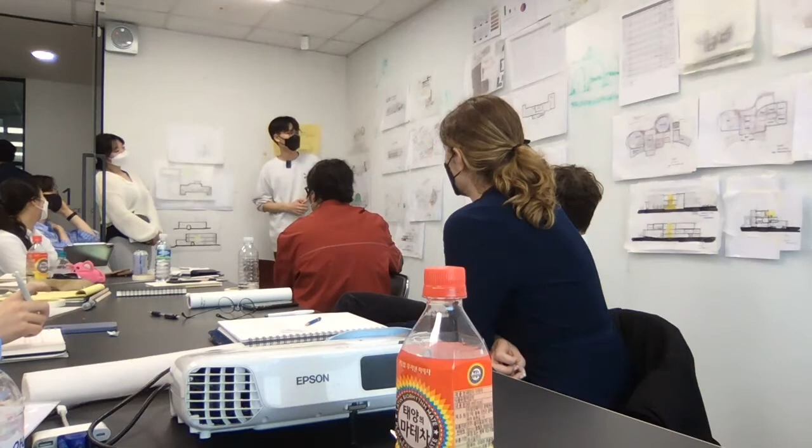And I also think that this side of the building is way too shy compared to how it faces the main road. So I think the artist house right now lacks this facade being more articulated and more welcoming to the people passing by here. That's why I want to extend this part to show people there is something here, and people can just enter through this part.

Okay, how about the extension in the back? Because you have this kind of addition to make a new entrance. What about the back, the south side? So this thing started with this line because I felt it needs to show here in this elevation, and I felt that there needs to be a balance to the addition here. So I thought there should be something here, and I drew this line.

And I found out that if I try to put all the programs, such as library and recording rooms, then there is a lack of a more open and lively space, a space with sunlight. So I felt that I need to add an open space with cafe and auditorium, so that people coming from here are also considered, we cannot not think about that.

So this can be a sub entrance. And since quoting from this sight line, I also added a diagonal line, so it feels more free, just like the facade here. So that's why I came up with these lines.

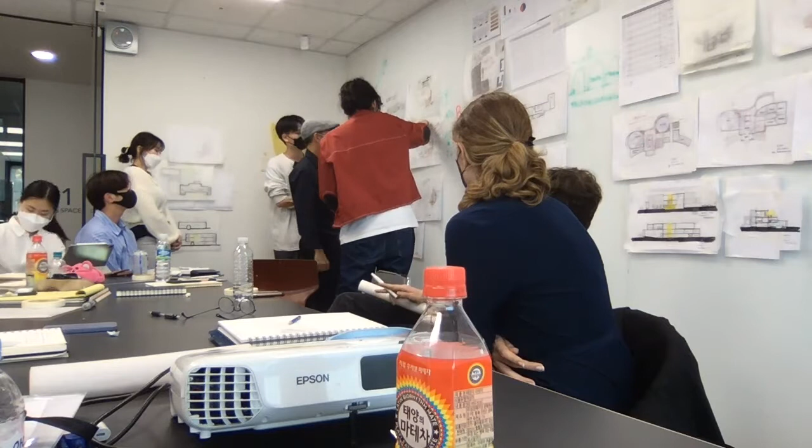Oh, they have some street on here because the building has some void on here, so they connected. So that was not really intended. This part is what you're commenting on. So this is where a study model may help you, because you can see through and see how it works.

More comments about this? Speaking of a second entrance, many will think he's doing a library. Who is doing a library? I thought there were more, three libraries, not bad. Who's doing a museum? Nobody, one museum, not bad.

But we have two healing centers, that's unusual. So those doing libraries, what inspiration did you get here? What is he doing wrong? What is he doing right? Or nothing to say?

So this yellow is this yellow here, so it's the auto spaces here. So it is first, second, third. It is this section, A to A. Okay, again, this is a problem of communication.

When you use colors, try to be consistent with them, so we recognize things, because I would think this was kind of the extension, which is higher. Then I see the section is a different white, right? But I would expect this color to be the same color over there.

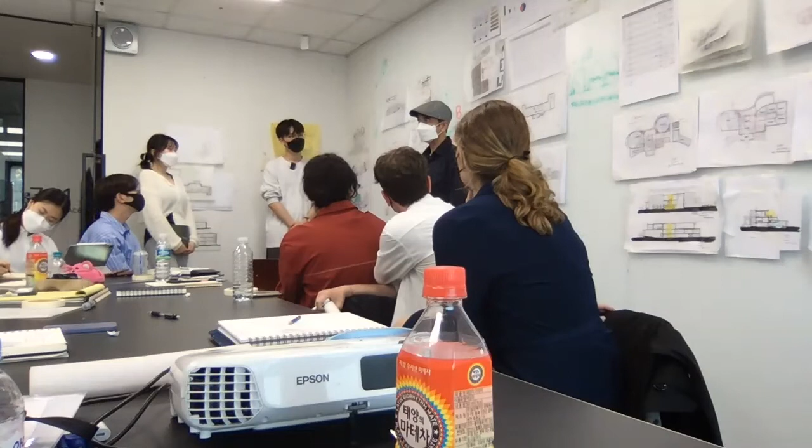So interestingly, libraries are very strict with the circulation, because you have areas which everybody can use, and some areas which need some kind of control. Even in Sweden, the country of freedom, you have some control to go to the library and to the spaces, right? So it's very open. So circulation, how you move around, is very important. Three entrances, maybe you may need more or less, but there is something in the middle, which is the entrance, right?

Imagine you have an appointment with your girlfriend. You say, oh, there's a great library in Marronnier, let's meet at the gate. And you're waiting here, your girlfriend there, and then you never meet, broken relation because of that. Well, that's something we have to be careful about, right? So if you want to make a main entrance, that's perfectly okay, it's a way of solving some problems here, but everybody should understand it as the main entrance.

And within the entrance is so clear that it's very hard to compete with it, but still you can do it. But that entrance should be justified not only because it is closer to the main street, you don't need to go to the full square, but also because it makes the full system of the library work better, or the control access and so on.

As it happened with the theater, the cafe is always an ambiguous space. If you're in a really controlled library, you cannot go straight to the cafe - you have to leave your books, get out, and go to the cafe. But you may have a cafe with open stacks, so it could be somewhere in between. You have to think about this kind of layering of the space.

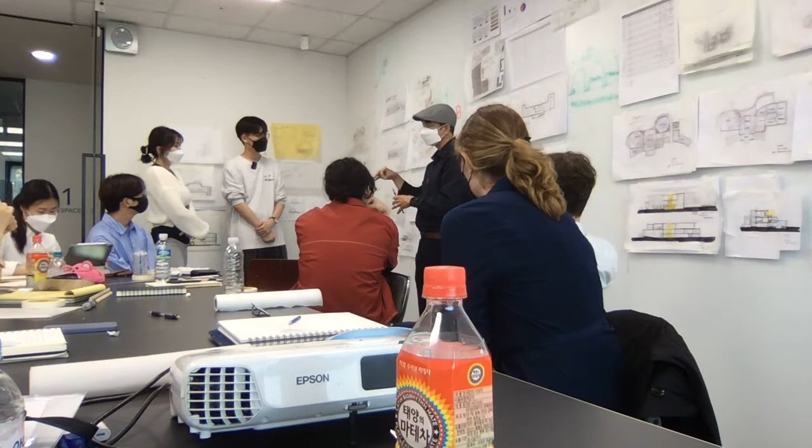Anybody with a library needs to really work clearly on the character of the spaces, because most of you have specialized areas and control the stacks. How is the circulation around? How do you divide people? And still, as was said, the building should be clear - you don't need somebody telling you the way at every step.

The anti-clear space is the subway. You go in the subway, and unless you know the spaces by memory, you have to look at the signs to know where you are. It's super annoying - you go downstairs, you have to go upstairs, and then downstairs again.

So don't do that in a building. This happens in a building, right? But when you study circulations, there must be logic. Is this in your project? No, I said I always go in the wrong direction in the subway, but maybe that's a me problem.

Not a problem of the subway. Well, the subway in Seoul has its things, but it depends. The older lines are more tricky - Line 1 is very tricky because it's very narrow, sometimes you have to get out to the street and change direction. Newer ones are much easier, but the problem with Seoul is the subway is so huge - even if you get in the wrong wagon, you have to walk for 10 minutes to get to the other side of the train. Well, yeah, but that's the anti-public space - you have to follow signs, but it's not inviting at all.

Try to avoid this kind of ways. One thing which I think is positive is it's very clear what is existing and what is the addition. But I miss the interaction - a small overlapping instead of always a very clear limit of new and old. Surely something happens in between, and I think this is most interesting.

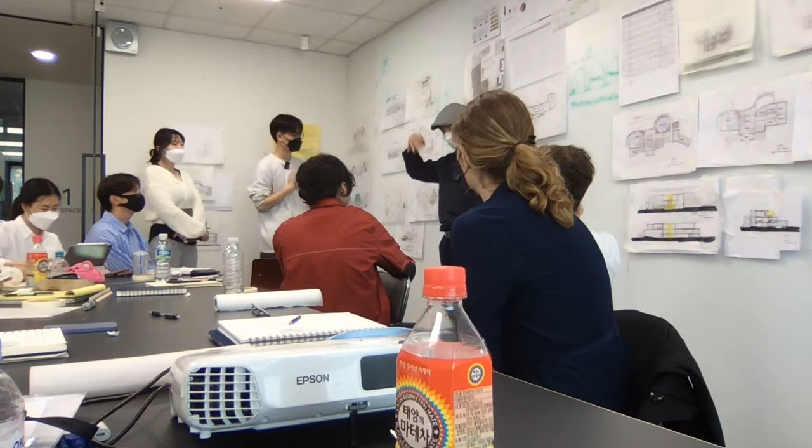Pompidou is a great building, in a very dense area of Paris, and it's a very intelligent thing. The moment you put the sloped ground, it has to react to that slope, and people stay there for some reason. There's a very intelligent way to have one more floor in the building without making it higher, with very easy access. As a comment, when you make something sunken, you have to make it feel like it's not a sunken space - you feel you're really not underground. I think that's successful because it's so big and fun. People go there and stay and play, because the ramp, the slope itself, is inspiring. So it's something which may be an alternative to those ramps, which could be a full space in a ramp.

There is, or there were - because one of them died last year, I think - a couple, one French architect actually, but there were a couple, not famous, but quite interesting, from the 1960s, 70s.

Who are they? Claude Parent. And Paul Virilio.

Maybe it's the recording of the previous session, since it went straight to the computer, so my hard drive is getting overloaded with videos. Okay, so the first session was recorded and will be on YouTube, not on the Zoom site.

So Paul Virilio, well, they did some projects in the 1960s, which was the oblique architecture.

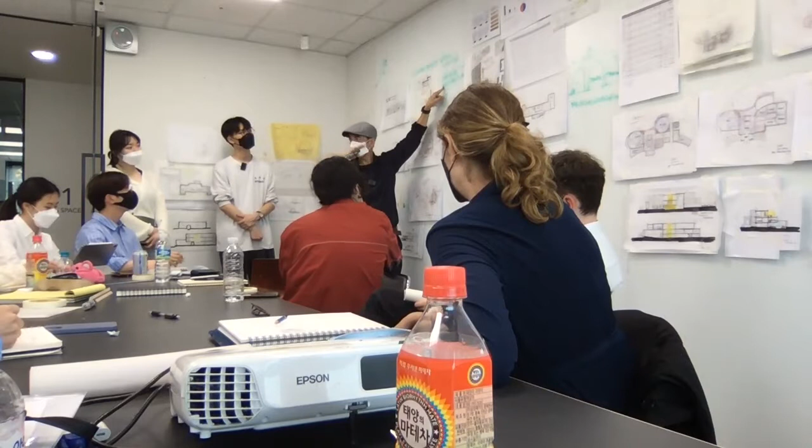Virilio actually is a philosopher, so he helped Parent set the ideology of oblique architecture. It's kind of a full theory of a new way of making cities. They were very radical: all buildings would have no horizontal floors, everything is slanted. So the full city is conceived on slanted floors as a way to have continuous space, accessibility, and more space with the same volume.

They did not build much with this idea. The drawings are fantastic, like Beaux-Arts, very beautiful pencil drawings. There's a book, you can find it I think in English also, a small manifesto on the benefits of oblique architecture. And I know they have, with this idea, just a very few projects, maybe one showroom and a church.

They call it the bunker because it's all concrete. So actually the church, you have the ground, and you have one element which goes up, and another element which goes up. So you have these two pieces of concrete from the floor to the church, and then the light comes in, something like this in diagram, more or less.

Okay, so this is to speak about, of course, the Pompidou is about this time, so surely this was published when they did the Pompidou, and this is quite a demonstration in terms of production. This could be possible. Yeah, this could be. So I think this is most interesting.

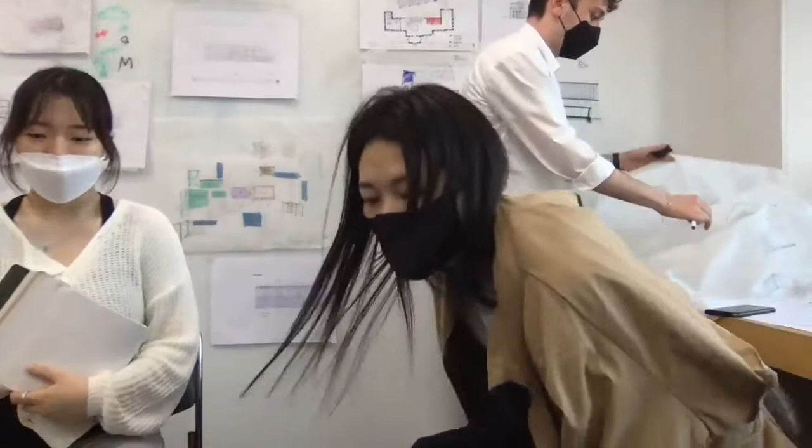Okay, go on. So what are you doing? Because you were with the bits the other day, and now you put things together, but still very much in just a building, a little bit of context. Yes, I'm again with the bits, but the bits from another part of the whole complex.

I've moved from the smaller buildings that I want to integrate into the square, into figuring out the main part of the renovation process, which is actually working on the building itself. Now I've changed most, if not the entire, inner configuration of the building.

After I looked at the beam plans and everything, most of the inner walls shouldn't be affected by movement, most of the floors shouldn't be affected by the movement of the inner walls, which means I have quite a large degree of freedom when it comes to moving stuff around.

Now, I still have my ramp building in the back of the existing building, and I try to fit in the program. So you're moving on the building? I'm not moving the building, unfortunately. But I have started putting in a program.

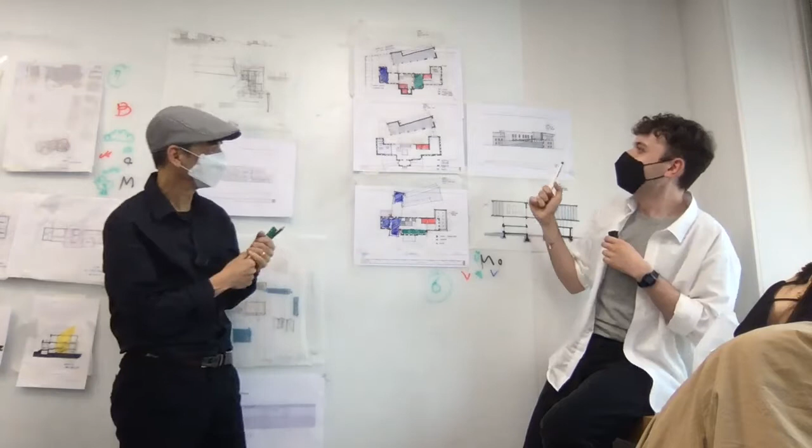Okay, go on, I still have to put everything together. Okay. And then in this side where the grid is, I wanted to do the outdoor welding and painting area.

I was thinking of introducing some sort of boundary, not to close it off, but rather for the safety of people who walk by, because welding creates a lot of sparks and is quite noisy, and also possibly blinding if you look at it, which is not fun at any time.

And then I kept thinking about the supplementary uses to the workshop, which also needs storage and service areas. In this case, I wanted to bring those into the building because it would make a nice core that opens up to different sections of the whole workshop area.

So people who are working outside with painting, working in the courtyard putting things together, or if anyone needs something from the building itself, they would have a center with the storage and some area they could use exactly for the materials.

Also, I've changed the core of the building. I've changed it into an atrium because I felt that would declutter the building quite a lot more. It would make it way easier to transit through and would give you quite a good idea of where you are in the building.

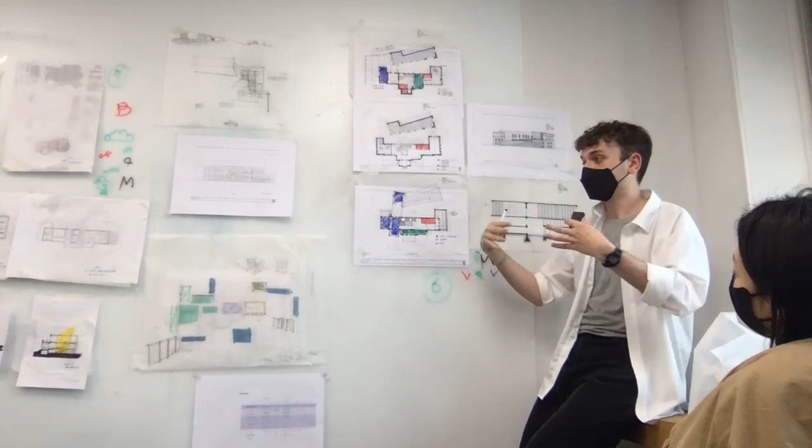It also creates a much more interesting shape, and it also completes the courtyard idea without closing it off on the lower levels, which means that on the ground floor you can go through it freely without any obstruction, but there is a volume above you.

Which closes everything off. This also helps with accessibility, since the second ramp that goes from the top of the workshop to the top floor is also included here, because I had the feeling that ramps inside of the building would be a bit of a mess.

They're quite difficult to integrate, yes. This is an overview of the south facade and how the ramp system works.

This is the first ramp that goes to the intermediate level. The workshop is quite a bit taller than one floor, but not as tall as two floors. I'm quite lucky because the floors get progressively taller, so that below the top seminar room volume, there's still enough space for people to be able to walk underneath.

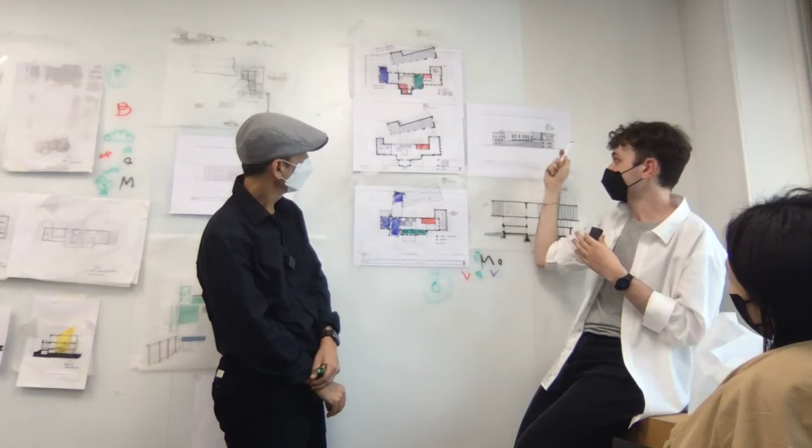And then this is the second ramp that leads up to the top level, which completes the circuit. This section is done through here, I think I've marked it. It's not very visible, but this is the section through the whole length of the added volume.

So this is the element protruding outside. Yes, exactly, this is the element protruding through. It looks bigger here. Oh, because this is 200 scale, this is 100 scale.

I might have made it stick out a bit more maybe. Yeah, maybe this is more proportional. Okay, because I wanted to see how the whole building would connect.

The existing building is this part, right? Exactly. And then everything else is added. This is the inner courtyard, as I said. Nice, comments to this?

Question, did you also work on the north facade, so the front facade of the building with the addition? Because you push through the building, but I'm curious about how that works with your cantilever.

So everybody's copying you today. You should get a fee from them. I have not done a drawing with it, but you will do it right after. I will do it after.

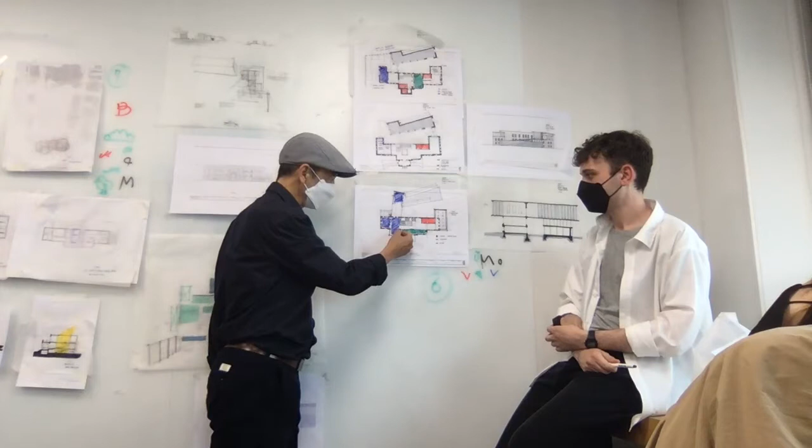Okay, yes, this is a very strong gesture. And actually you have a very tight thing, which is very difficult to solve. So probably you might experiment a bit more with different options.

This space I find very important though, because it creates a very strong contrast, especially since it's casting quite a huge shadow on the building. I feel like this space in particular, and also this joint here, will help differentiate the two building parts and make it stand out even more.

I've also started thinking about the material, and this large load-bearing wall would have to be concrete in order to take the weight from the ramps and all of the circulation happening down here. But most of the building itself, I really wanted to make it out of wood.

Cross-laminated timber would be quite helpful for large spans. You can also use massive wood, which is better even than massive concrete in some cases. We work with those a lot, and I feel most comfortable with it, but I'd say just to avoid concrete.

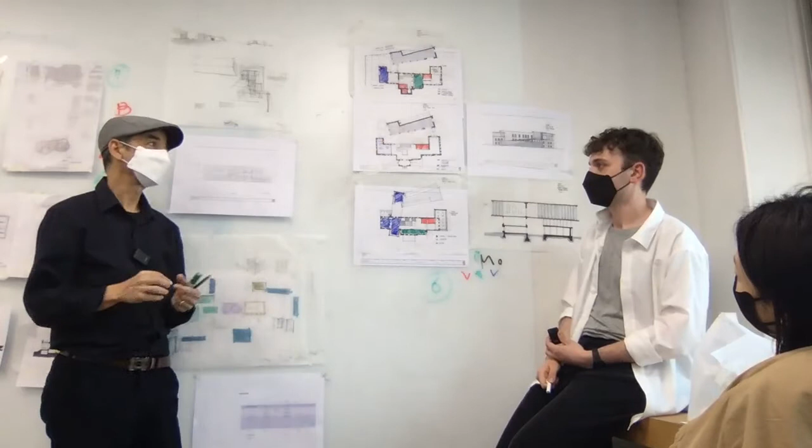Well, I would avoid concrete if possible, but in this case it might be difficult with the weatherproofing because wood is quite sensitive to dampness and moisture, especially in these cases where there's a ramp and the possibility of many infiltrations going on.

Well, you may work on it, but it's doable. Concrete is also sensitive to infiltration, and even worse because the steel inside will rust. This happens in all buildings, you will see the concrete just popping out of the reinforcements.

Okay, so one question of the person who was copied. More comments about this? No.

Okay, interesting the process. So this is quite personal. I think you still, it's good to come from the bits to put the things together. Okay, but still one more step, right?

Yes, it's nice you go to 100, but I think it came too early, and you have so much in your head. Now is an excellent moment to make a small model and test on the side, because I wonder about the scale of this space. Being one floor may be okay, right?

But okay, telling, this is all timber and glass, it's also very easy, thin and glass. And the model you put actually looks great. I even have the measurements down, I just ran out of time.

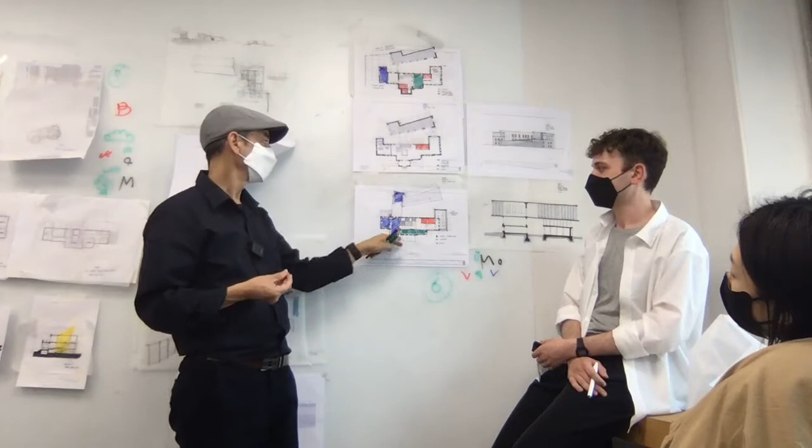You don't need to say that, we see what we're able to do, I'm very honest. Probably you're drawing with too much scale at the moment, which is not necessary, so you're wasting time. Not wasting time, but this could be a midterm presentation drawing already.

For this school standard, that's okay. You can add just a little bit more keywords and some kind of picture. When you're working, you can put just your next sketch over, you don't need to get all the windows done. There's a lot of time to do those things. Some people like to feel better when the drawings are clear.

But if you do this at every stage, it takes forever and it's not necessary. That's one thing, the model. It's interesting you did this section, but I would expect more sections and elevations at scale before you go to that.

But I wanted to see that cafe, so I can just focus on your cafe because it was the area with the most effort put in. It's not here, I will put everything together on Friday and bring it. Yes, but when you put things together you see we have to adjust things and redo a bit.

I would suggest you keep things together. You were telling me this ramp is going outside, right? So probably this corner is going to be, well, on the first level we need to see the street, but it's a bit on the limit of what we can do. The border of the plot will have to be 1 meter away by law, but I think 1 meter won't affect much the whole thing.

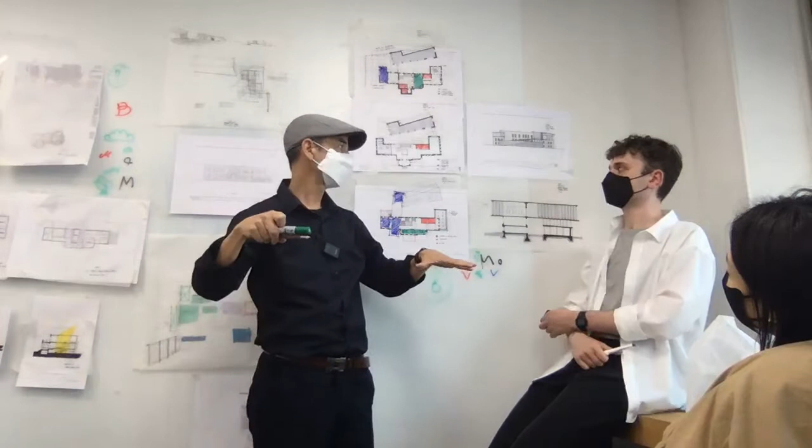That's secret, don't tell anybody. But I think this could be an urban element, you could say actually this roof is public space, the street will be open all day. But if it's on the street, maybe it should be connecting something else, so you have something you can use more continuously.

I encourage you to use the roofs, including the top. This is really about wanting people to be there, and it could even go, well, it goes inside the building at some point.

At some point you're going inside the building, right? I know you're going to the roof. Yeah, it's underneath the building, so this is where it's a different, suspended part. This is different, confusing.

Cut here, so 1 meter above. Okay, so we missed this, probably this floor should already show this terrace. So I think we need to clear it, cut even higher, at least for the ramp, otherwise it's a bit confusing.

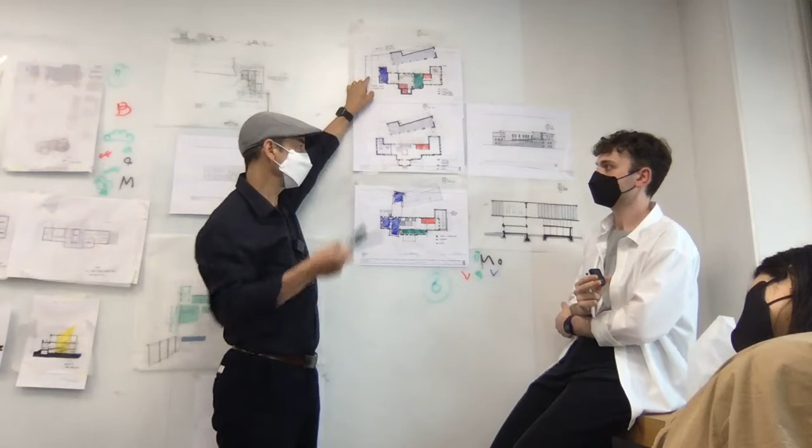And then what we said about circulation, the building is more free, but if you have people working, circulation is not so free because you cannot have children running around. So you need some kind of filter there for the circulation of people who are working.

Right, but now it looks open to the square and everywhere else, and this is a very public space, so probably you have to explain that a bit better.

That is okay, the larger scale stair is better, but I find this one very small. The toilets are uncomfortable there, they're very intrusive, probably they could be in some corner extension.

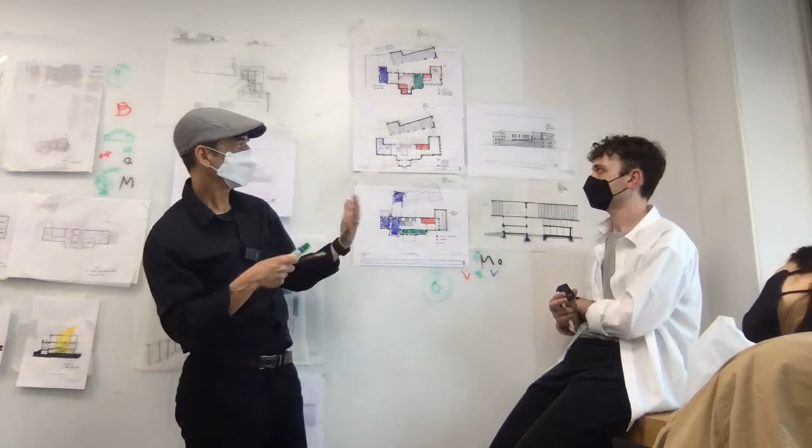So you have a really nice atrium. You could also test the stairs outside, because now the stairs are a little bit big for the building. But okay, this is why you need to test many things before you spend so much time doing final drawings.

Thinking of the material, timber is an excellent option, it's sustainable, soft, durable, trendy, and difficult, whatever, as you said. You can have everything perfect, that's a good choice. Concrete is okay, but in Korea concrete is kind of the obvious choice, so if we can do without concrete, better.

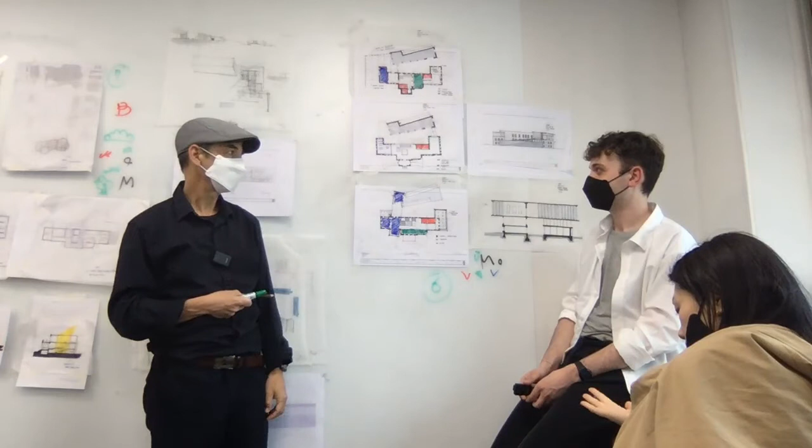The toilets feel uncomfortable anywhere. Well, probably have to think of the toilets not as an abstract addition, but as part of enjoying the space or moving around. Toilets, we have to deal with them, and they're accessible toilets, so you will need a lot of space, and they make sense near the access.

Of course, it is yet very abstract. And you have toilets on every floor, which is a good idea. I try to align them as much as possible, one on top of the other, except for these ones, because it's near the workshop area and they might need a bit more space to clean, or it's more of a wet room. So yeah, probably could be this whole space around there.

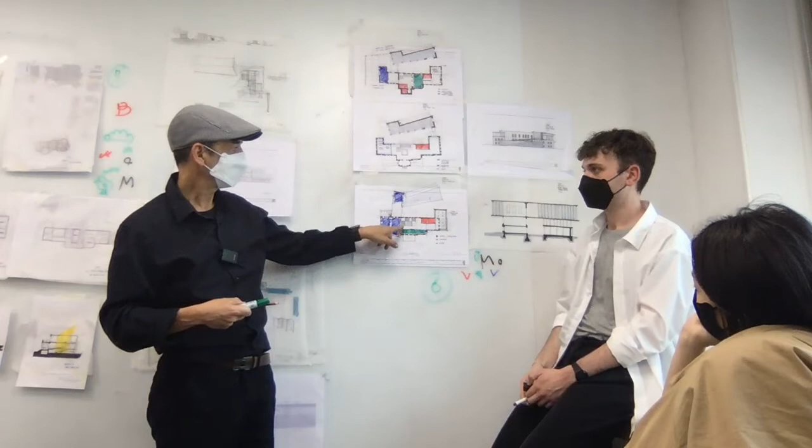Okay, actually these are the ones which are a bit more convincing, the areas, because this is not in the middle of everywhere. I try to align them as much as possible with this axis so I move them away from the main atrium, but they still take a lot of space, so they still cut through. You have a very open atrium with a monumental stair and a tiny opening.

It's a bit. I don't like them. This was the best compromise we have to find in a design, a better place for them. And this is where the extension may help, and maybe we need that missing part, the coffee shop. Okay, good.

We will take a photo of this, and our next winner is somebody with 4 points. So okay.

Okay, can you put it in a proper location? And can you pass this to Yunjong?

These are so cute. Huh? These are so cute. Very classy.

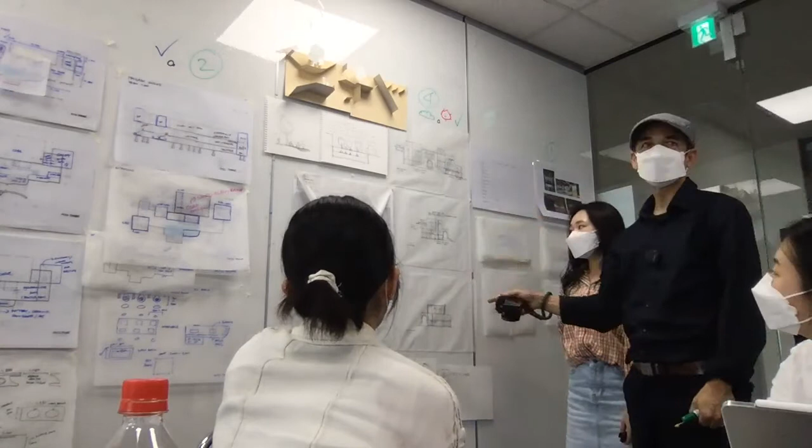Okay, so we have a lot of things. So you brought back your drawings from the building. So this is nice work, right? This is kind of what you submitted for the building analysis. It's kind of superficial in terms of analysis, but at least it's a full set of drawings which helps you get familiar. So you could use them as a base for your design, putting tracing paper on top of it to make your sections and elevations.

And we have another model, an abstract model. So start from there. What's that? So that's a section. Okay, so what is it?

At first, I scaled down the program, and from these words by Louis Kahn, I came up with this image, and then I thought about why people gather below a tree. So from this I came up with these first images.

This section was intended to make the same effect as this image. People gather below the tree because the tree protects from sunlight and makes some shade. Also, below the tree, people can see the landscape or surroundings. So I wanted the same kind of filtering, with this tree, in this model.

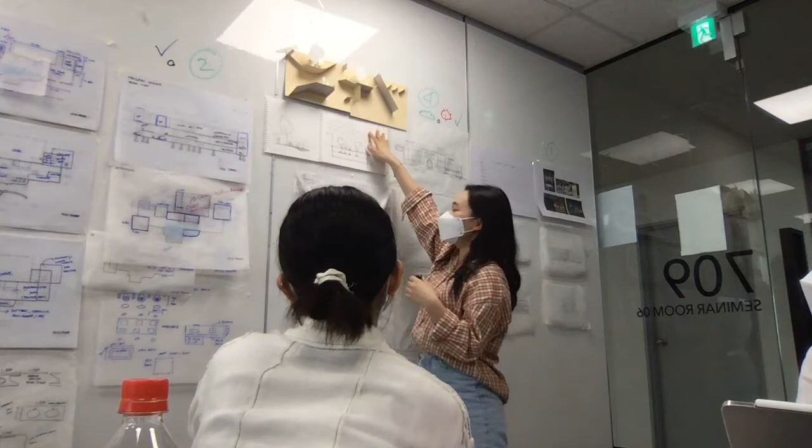But there's, okay, so there's supposed to be people and trees. People without hair—you draw them on the inside. Okay, so I guess the head is inside this volume. So this would be like somebody with a face there. Maybe. Okay, but when we have the trees already, this is the space. This is what confuses me a little bit, because it's very clear to be under the tree, and you have a Newton, apparently, because the apple is falling on his head.

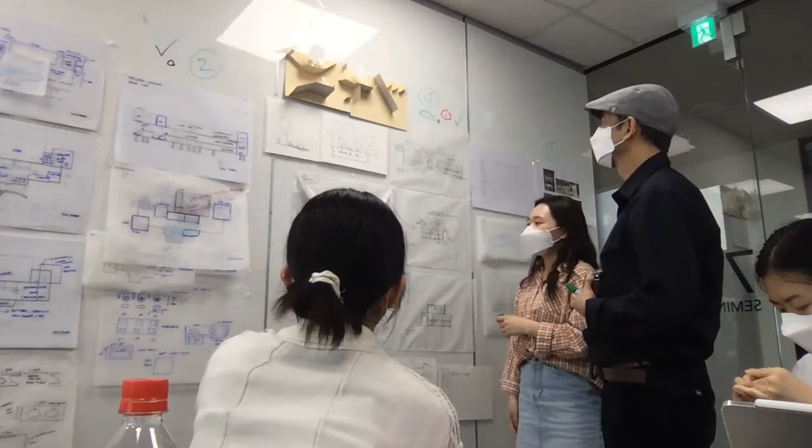But then the ground under the tree is a totally different thought, right? Yes, but maybe this is just a kind of thought. So I think, okay, this is a kind of symbolic tree and symbolic leaves and so on, but there are real trees.

Okay, and then how does it go to the project, to the new program, and to that sketch over there? This sketch is the development process of this stuff, so this is like the ending point. Okay, and this is in between. Explain a little bit so we can follow you. Maybe both of them in between, but okay.

I marked all of the trees in the Marronnier Park, found some voids between the trees, and this is another try. And I found some voids of voids, because according to this image, people may gather below these trees. I thought that the void of the trees may become— this is a no tree area.

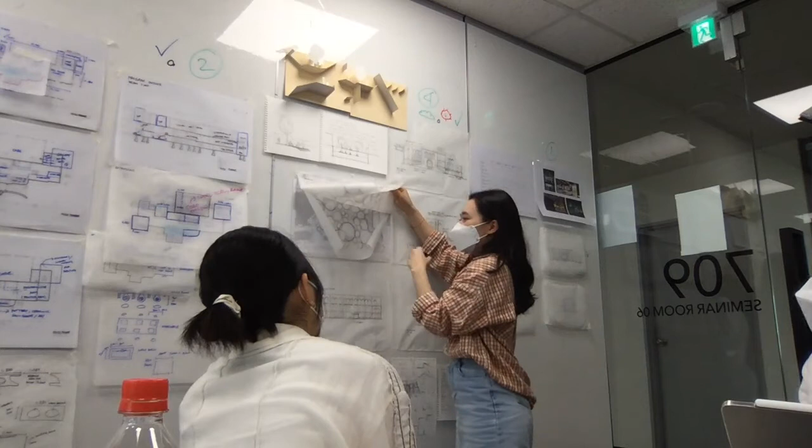Okay. It becomes the open space, let's say. Then people can— this is maybe the movement of the people. This is some discussion area, because void means trees area, so maybe this arrangement will become the discussion area. Things happen like this.

Yes, that's it. No, and then, like you said, you had the process. So I think we need more because we don't follow. So you have the existing building untouched, but then something changed. You have to explain what's the new program and what is the building and what happens there. Because I see a lot underground and that worries me, but then I see something on top of the building. It's very hard if you don't say a bit more. Probably you're thinking yet, but yeah.

Okay, just tell us what is in your head, because that part of the park is interesting. I'm not sure I follow you totally, but then you changed the building in size and program. So what is now the name of the building, or what is the building about? What?

My program is still students university, but more scaled down. At first I think about the curriculum. There will be spring, summer, fall and winter semester each, and each semester have different subjects. These humanities, living environment, society, economics, and culture and art need some lectures. And this citizenship and futurology subject needs some discussion area and research and creation area.

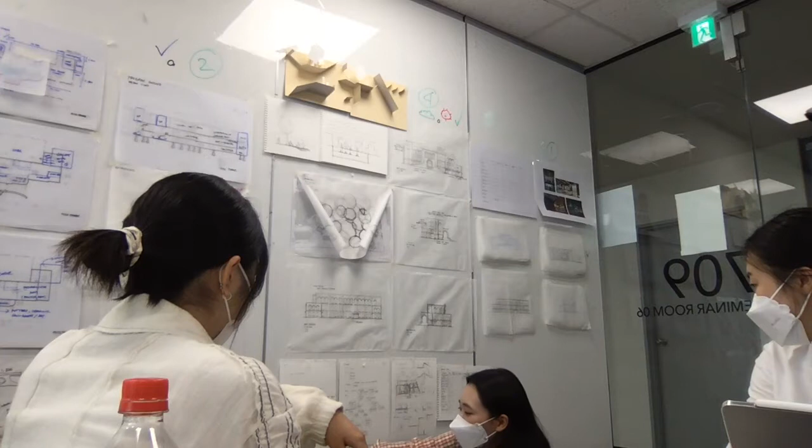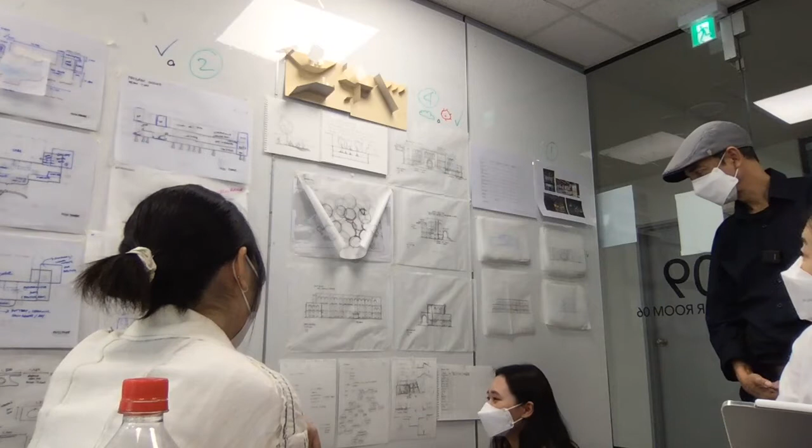From this, then I think about more some timetable of each subject, and according to this curriculum I made some programs. The educational basic facility has administrative office and professor's lab, lecture room, discussion space, research room, and lecture room can divide into two lecture rooms according to those characteristics. General lecture room means really general lecture room, and practical classroom means something like dancing room, then research room means laboratory or strategy.

Yes, okay, and then this is like the list of rooms in the area. So a little bit on the big side. Yeah, and this is kind of elevation, kind of plan, kind of section, kind of, I don't know what. It is also sections, more detailed sections of this image. So of that, what goes in the existing building and what goes in the extension?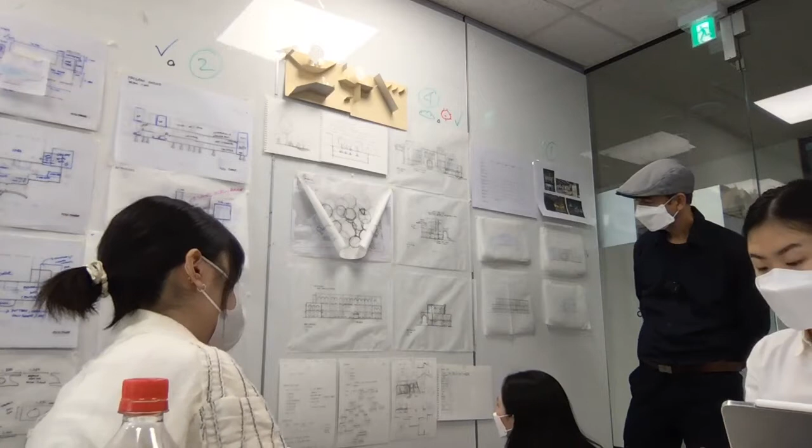I'm thinking on that. And then everything you put here is about the park, not about the existing building, really. So maybe slightly, but I mean, I think much about the connection. I'm working on that part.

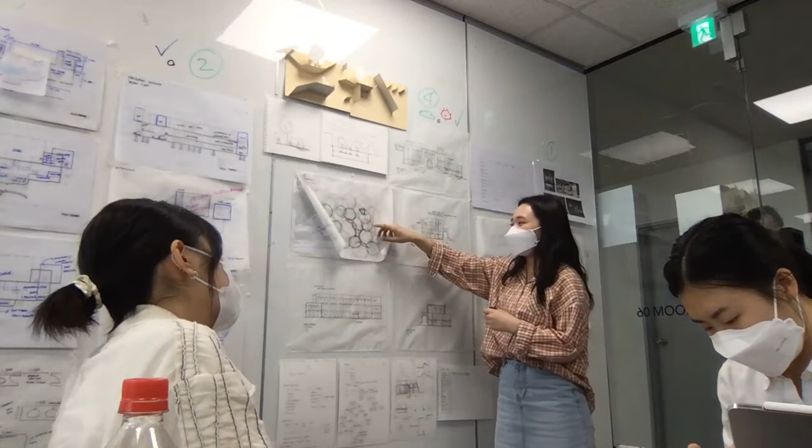Okay, so comments about this, because it seems everybody's very excited about this project. I think I saw this image somewhere also, but there's a different motivation. This is the space without trees. That's interesting, it was because I was thinking of making a tree a center and make a circle also. Right, yeah, so it's kind of complicated, because when you go to the intersection, this is like really where you have a tree, right? Yeah, so then what do you need to draw so many circles?

Just go straight to the trees. Yeah, this space, okay, this is okay, comment, suggestion. Because Yunjun is working a lot, but having a hard time to, you can see that the abstraction works very well. The model is interesting, but then things become very fluffy, right?

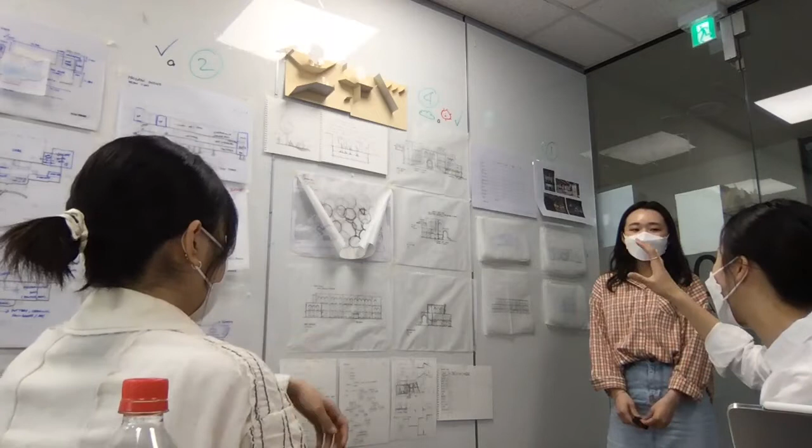So I have a question: where is the connection, so if you're in the main building, how do you just go outside to use the underground, or is there like an underground connection to the? That's exactly what I'm working on now.

Everybody is speechless. Okay, so this is interesting. Actually, we had, oh Sunjay, come here. Come here, so we can, yeah, because it gets recorded. Okay.

You're making the underground space under the trees, but when you make the roof with the trees, you should make some very thick roof. It's okay when you make some small trees or grass, but when you see that image, there are very big trees, so you should make a very thick roof, and you can go more deeper. What do you think about it?

That is also my problem. Okay, so when you start in a line in which you have only problems, maybe you should look in another direction a little bit. So let's say get a problem as it is. Still, Citizens University is kind of an open university, like continuous education or open education. I don't pay so much attention to the curricula, because that may change totally, and then you have no motivation for the building. So it's really much like a normal educational facility.

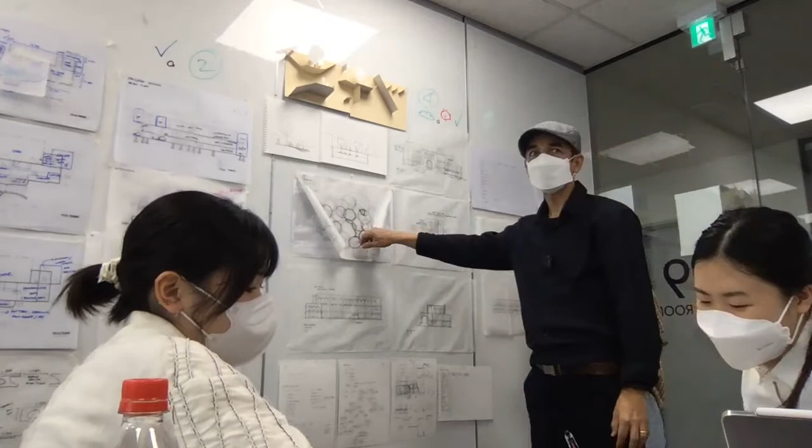We had one student doing this. He was extending the museum because we share the buildings, and he did everything underground. It was similar to this process, but to go under the trees, under big trees, is very difficult because those trees... let me draw this.

Okay, I get this. So this tree will have roots like this, probably not so deep. So the moment you excavate, you'll need to excavate really, probably 3-4 meters under. If you go in between, you have very little space and you might kill the trees, which is not good business.

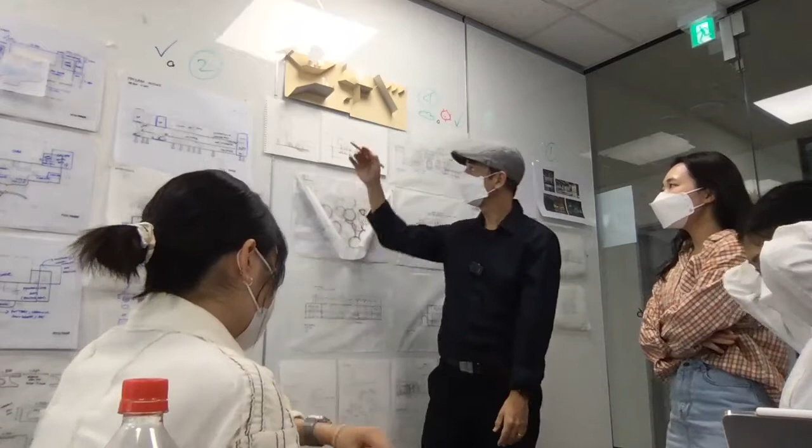But for sure you will have groundwater here because we are on the side of the mountain next to it, so probably we'll have a lot of water. You have to fight with the trees. And then these are totally different things, which is what confuses me. Under the tree is under the tree.

First off, trees are great because they give shade. They are a landmark, they set the space. In Korean villages, you have the kind of old tree of the village — a beautiful, enormous tree in Hahoe Maul, Andong. Actually, I have to go there, to Hahoe Maul this weekend. It's one of the old traditional villages. There is a space, it's kind of a sacred tree, right? It's on the east side, southeast side of Korea.

We have a field trip of the department in May. They go to the southwest. It will be on Friday, so it is our class time, but you can go, so you will see other places.

But would it be in Korean, because they provide information only in Korean? But if you see the building, you don't need explanation. Somebody will help you, somebody who can speak English can tell you the basics, but I have done hundreds of trips with Korean guides and it's just kind of background music — the places speak by themselves.

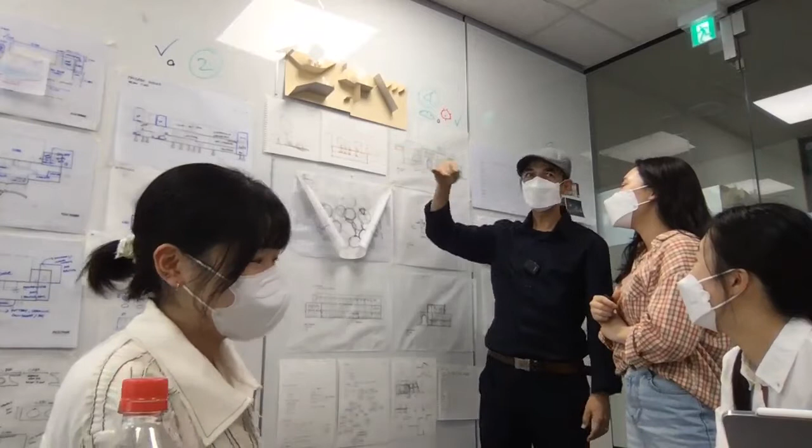So recover this, work on the surface, right? You can go under, as we say, occasionally. So some small part can be used like the Pompidou Center, but it should not be the core of the extension, because then there's no problem — you go underground, you don't touch the building. That's great, no problem to solve, only something technical, right?

And I know you did some kind of underground, half-underground building before, so change a little bit, right? Don't stick always to the same thing. Okay, so, and this is interesting — this could help you with the landscape. This is an interesting thing because it's not just one donut, it's the empty spaces.

So you can give something which just continues inside the building. You can create those kind of meeting spaces without the same thing Sanjun is doing, or Sunmin will explain later, right? Because probably they don't need to be circular — could be some kind of convenience there, right? But two things.

Make this as it is, but public, not only for people going to study there. What space can you provide for anybody going there to be comfortable even if they're not taking classes, and walk over the ground.

Three ideas, okay, but underground should be just occasional. This is unrealistic - this will work with a model, with cardboard, not with real things, with a real building.

So nobody would excavate under the trees. And we have big subway construction - very often the trees are lost because they cannot survive, because you change the groundwater. Those trees live on the water which infiltrates from the mountain. If you cut it out, they would have a hard time surviving.

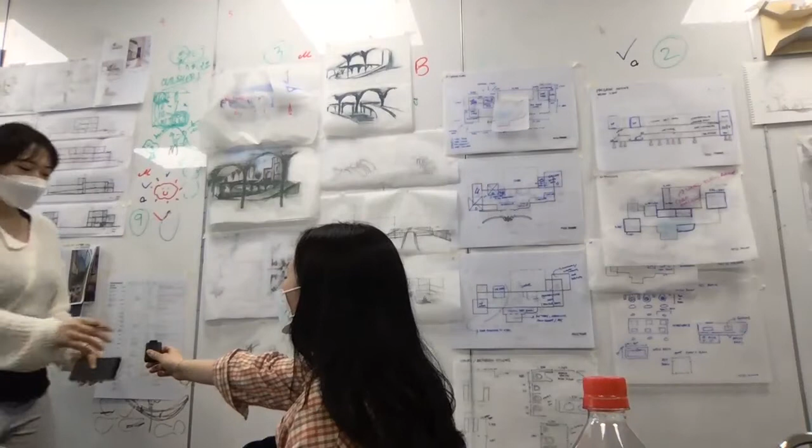Just a moment, I will take the photo. I took it before that - now I fill it with orange.

Okay, go on. The drawing is suddenly in order - you have a lot of inspiration. You were stuck, and now everything was in my mind, but I still have the bottom paper - struggling with the expression. Go on, yeah, this is expressionistic, expression.

The order is not in the right order - go on, tell what is important, don't explain everything because we never end. This is my main image, main mood of my project - a bit dark, not so much dark. This is also a very bright place because you can see the sky. Anyway.

So this place, what I intended - you guys can remember all the bubbles of the Marronnier Park. Yeah, that could be already imitated, extended too much on the open. So my building can embrace all the bubbles of the park, and that's why these are the embracing things. And here I made an entrance, which is a ramp.

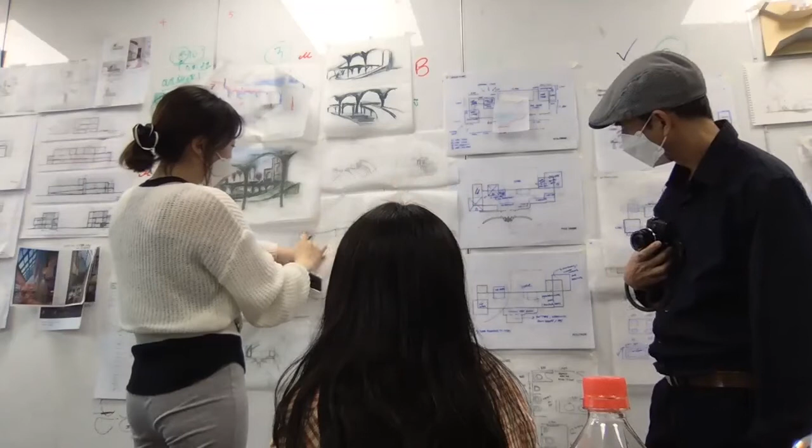And this is the thinking of shape, because this seemed unnatural for me, so I made the experiment. And this would be the entrance from the park - this is the section, this is the basement.

This is the elevation from the park, which I retain the entrances to the building, but also to the basement, which is going under. And also I am thinking of making more extension on this side, and I'm still working on it because this side was my main part.

What is this drawing? This is the drawing you can remember from my image drawing, the chemistry. Yes, and this part would be the chemistry part. I wanted to order it so it can have some layer between the programs.

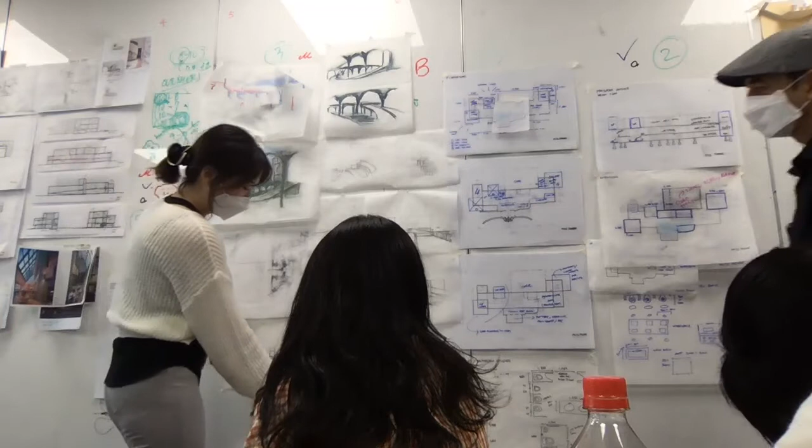The chemistry is most interesting, chemistry is exciting - this one has some kind of character, which overlaps with those things, right? Because this looks very much arranged, and this looks a bit more random. So I think that balance between randomness and order is something you could try to keep.

Yes, okay, and then you have the final program. How big is your building? Oh, what's up, okay.

How much does your building weigh, Mr. Foster? You know that famous question that Mr. Fuller made to Norman Foster - Mr. Fuller, the genius engineer, asking Foster, how much does your building weigh? I was like, what? The weight of my building? And then he made a full documentary with that title, which, by the way, is not so great.

So it's a bit on the smaller side, right? One thing is, when you make extensions, why do you need the extension and what is going to go in that extension? Because you're doing some underground work.

Just mostly because of the connection with the square. But I think making it underground just creates one more barrier rather than really joining in. So actually, this drawing makes this boundary even more patent. It's not really embracing — I would think to have something which brings more continuity in this area, so that's why I thought of the section, but the section also kind of ends here.

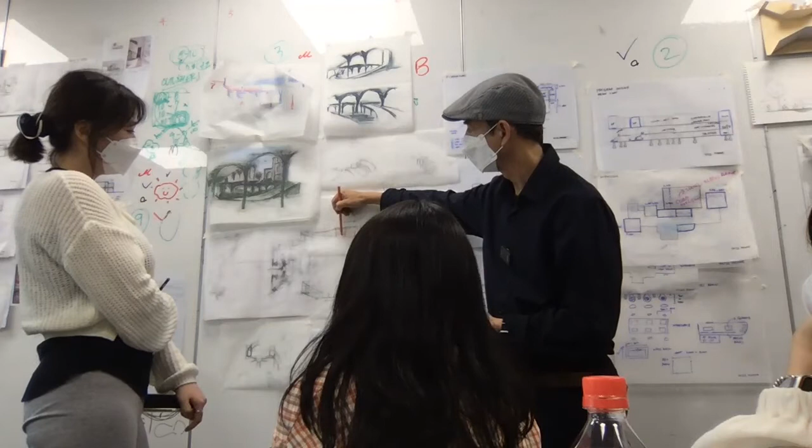So right now the basement is very low — okay, and you make it larger. Then you'll have to work with the existing structure to work under the existing foundation. That could be done — you won't have much freedom because the basement isn't so nicely done, but you can still work with it. The question is, you get the same space, just a bit improved, with a lot of effort.

So the question is, is it so necessary, so much better with it? And you're changing the whole aspect of the facade — the building becomes much higher, right? So you have to deal very hard with this area.

So I'm not saying no — sometimes I would say practically not. This could be, but I'm a bit puzzled. You need a really strong reason so you can carry this design through to the end. Otherwise you'll try to cheat yourself to make things easy, because it's quite a complicated thing to do.

Okay, but I want your comment. So Mim, tell everybody — so what? Say so, yes. Yes, well, for me, I like what you said — try to go to... what? So trying to go to — I didn't hear.

So the underpart, the chemistry part, kind of has an order or something, and the upper part has a lot of freedom. For me, I like the beginning, because well...

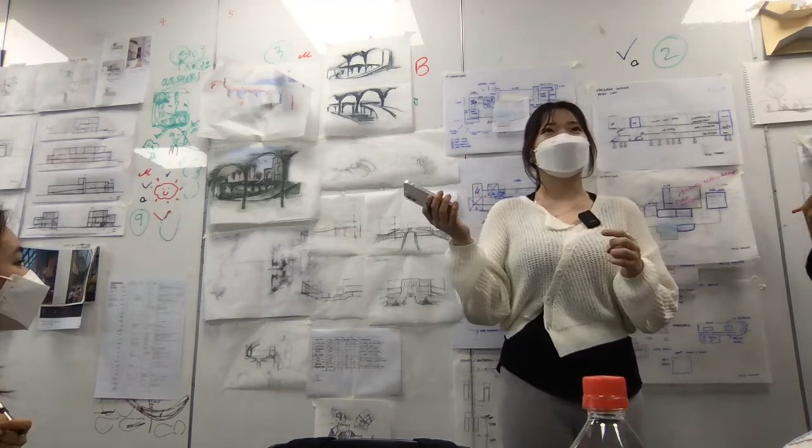You have many options, but I found that this building was quite more symmetrical than unsymmetrical, so that's why I tried to make my extension, okay, naturally, so, yeah — pretty much, and whatever we do, we'll break the symmetry for sure because we are adding elements to react, so that you understand the point.

So the extension is not very clear, because right now you're working just on the abstraction of the building itself and the site, but not really how this relates to the program. And I think there's a moment in which — so, except for the toilets, everybody has its place, maybe things move around.

So this is an extreme case, right? But yeah, it's like the extreme of the opposite. Yeah, and actually this color — I wanted to show the people who are here for work, which will be artists and citizens.

And this cave would be artist cave. Maybe people can... but I was thinking, you need to pick some order, and the order probably is not arranging this, if the chemistry was interesting, because chemistry has its own logic, right?

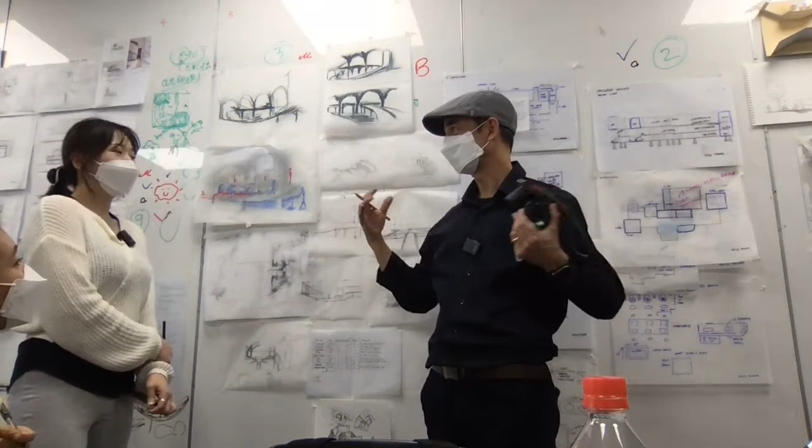Chemistry is like the same as astronomy. The galaxies have also their logic. You can think big or small, but you cannot break it. If you try to arrange things, this is kind of a macroscopic universe in which we shape things and make them nice, right? But chemistry or galaxies have their own logic. You cannot break it. They need to have their balance, and they keep changing all the time.

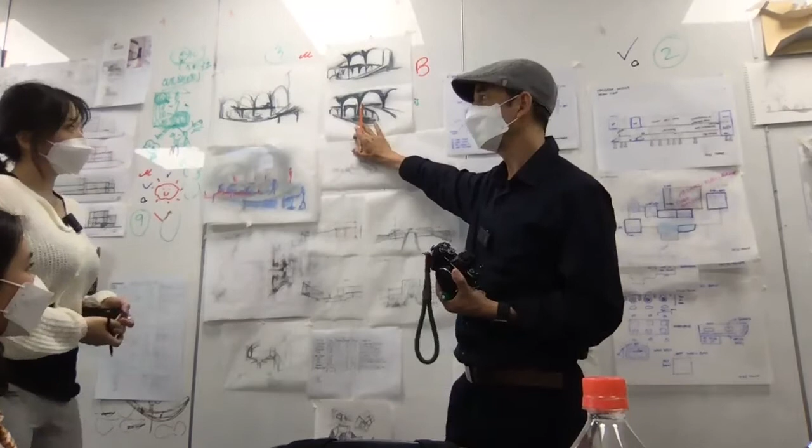So you don't need this gesture, but this is great. This is a very unique way of working, but you can be expressionist. You can look back at the Germans we saw in the drawing lecture, because they work very much in this way. We all know this building is about arcs, right? With some discipline, we have mainly two kinds of arcs, maybe subtypes of some, but the big entrance and then the windows. And you're adding one more.

There are examples of this kind of architecture. I would like to see your sketch. It reminds me of the Mezquita in Cordoba. Are you motivated? No, not at all. But now I can see the corridor. Yes, but I don't think that's the point. But it could be, right? Because Cordoba is mostly interior space and very regular.

So the change comes from the perspective. This is like adding layers to an existing building. So I would play with these arcs and the new ones you make. The moment you make them higher, you're breaking the proportion, right? But you play with the proportion, so you have many things to work around. And then you're making them smaller.

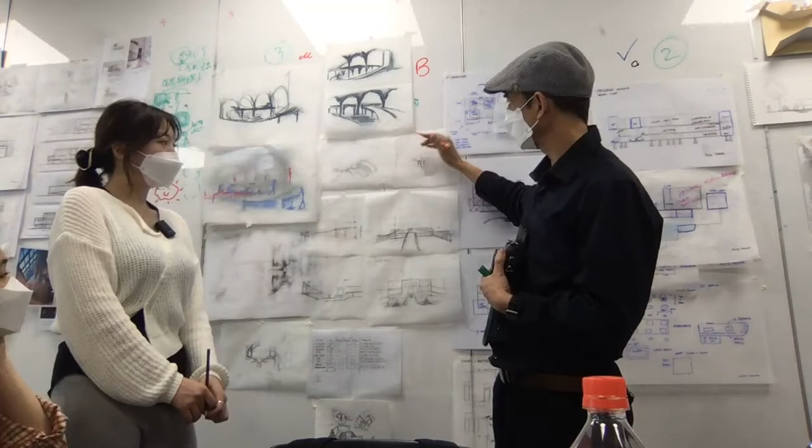You have limitations, so work with the arcs, assume them. It's not easy, but assume this as kind of a structure, space definition, design subject, because it kind of works. But then try to see how the site intention, the chemistry, and the program can fit in this idea. Okay, so you organize a bit more. And don't try to make things—I think this could work, this is nice, but there's not chemistry anymore.

Here everything is parallel, but those arcs can be in different directions. Also, I can have solids and courtyards in between. So you can have a succession of voids and solids, or maybe courtyards with arcs and without arcs. You can get inspiration, not from Cordoba, but probably Alhambra is right.

Any of the really mid-East small old towns - I'm thinking now of Marrakesh, because I was there just before the pandemic. The streets are tiny, but they have entrances and courtyards on the houses with dark accesses. Then the streets become a small square with a small market. So you have a succession of corridors and voids, and it's hard to know if you are inside one house.

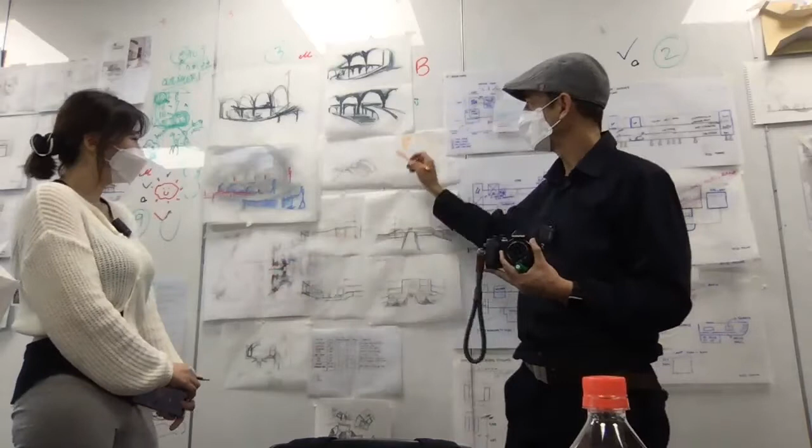Marrakesh is more natural because it's a small town within a large town, and suddenly you have a huge opening - the market square, which is empty sometimes, but as soon as the sun rises you have the market going there. At night it's a place for food, and you have things going on because many of the things they put in the market are snakes. I was taking photos like all good architects and almost stepped on one, because the market is on the floor, so you have to be careful where you step.

Everything is mixed, it's really messy, but there's an order there. It's nice to see how the squares, courtyards, and alleys make this kind of structure, maybe not so messy, which also has a structure itself. Okay, that's nice.

Get some order there - you have to move fast. Oh, already 5:30, tea time. Are we able to finish today?

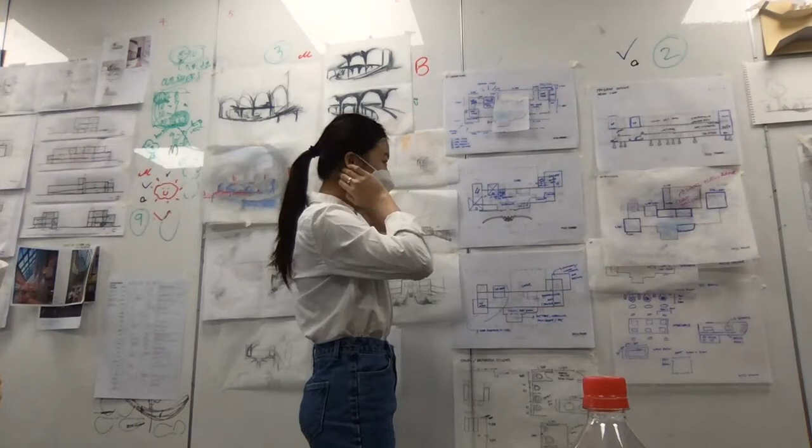I tried to make the balance fixed so I could start precisioning all my programs. This is what I first worked with, but then I realized I didn't have enough space for circulation, like stairs, ramps, and the elevator. So I decided to make a bigger extension just for the purpose of circulation.

The reason I put this here is that I initially put the bathrooms here. You thought about bathrooms? Yeah. Okay, go on. I know it's better if in the building the bathrooms are positioned in the same spot on every floor. Don't get obsessed with that. That makes sense, but fine, don't get obsessed. But yeah, I kind of got obsessed with that yesterday, so I was just trying to think where the best place to put the bathroom is.

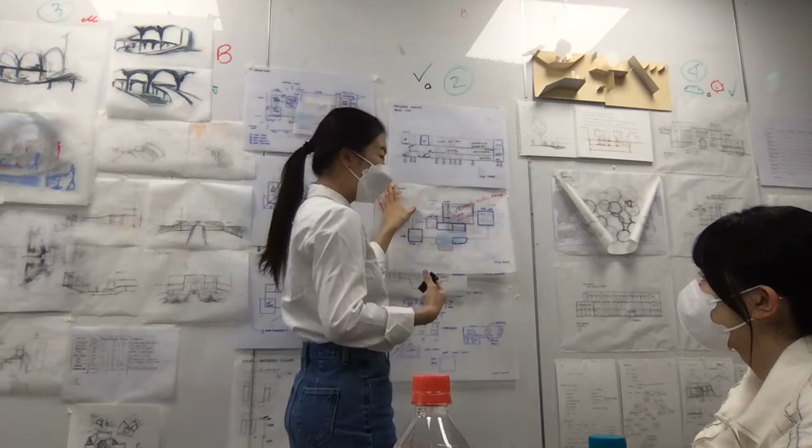I wouldn't say it's creative because I just did studies on dimensions so I could fit things in. I worked with these four, but then I felt trapped in my own thing, so I gave myself some more options. I think I need to work more on the actual best spot to place these, because they weren't intentional - they were more instinct for me, I put them there because they looked more balanced.

Okay, yeah, so I can follow it. Tell us about this section. This is just to show how the spaces would be used. Can you point out the modules in the section? Basically these three - I have four, but I'm not sure about that one yet.

So one, I don't see the blue as a module. Yeah, so these two for example are here, and then as you can see there's a void. So if you're situated in this position you can clearly see what's going on downstairs - it's a void, but inside the building. No, you don't see the sky there, because the top ones have different uses which I named as open spaces, but they can be used for whatever the building or the users feel they need. So they can have different uses. And this one is the tea area.

So you have very clear dimensions, it's 8.7 by 8.7 - you have the dimensions here. Yeah, 8.7 by 8.7. And then the top one is just a small gallery.

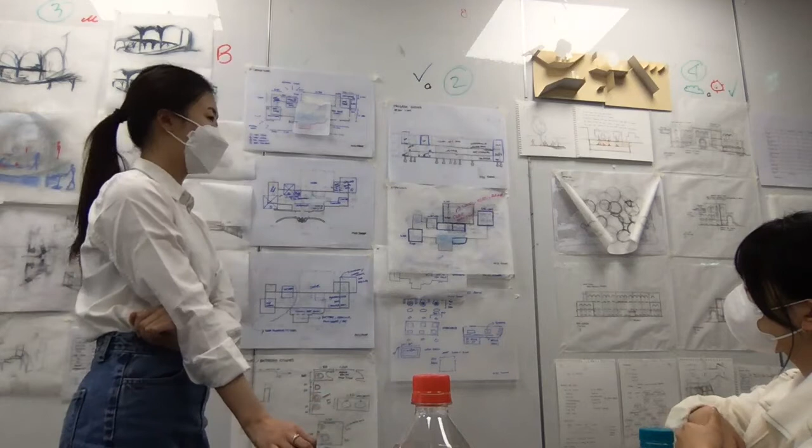The other thing is this makes very clear the need of a very good section base drawing, not the one you're using. Because what's the point of replicating all the foundations here? It's totally meaningless, just wasting time. We know this is solid ground, very heavy, and then we know this is a roof, but since you didn't draw any line, I don't know if you're really removing the roof or not. So it's very confusing. So with the same care and rigor you work in the plans, work in the section.

We always make sections by putting the sketch over the plan, right? So you need this drawing only to get in the lines of the floor, maybe the structure, and then you just put the sketch paper over the plan, and you start just checking in section how they are.

We say that one floor plan can draw all the floors. You can have several sections in this line because you can make this space in the front and then check how is the back volume, right, with different transparencies. Then you see the whole volumes of the building in section, as you see here in plan.

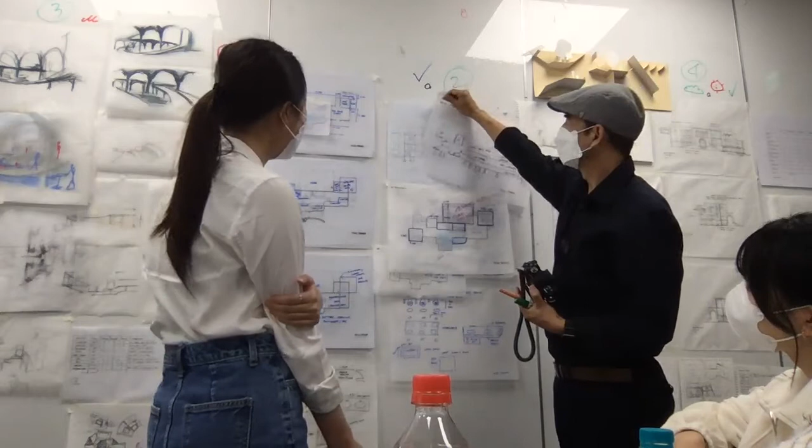This section says very little. Looks like it's done in a hurry just to reach the class time. And the scale surely is wrong. This is not 1 to 200, maybe 150 or something. But look, that section has a lot of noise, a lot of information we don't need.

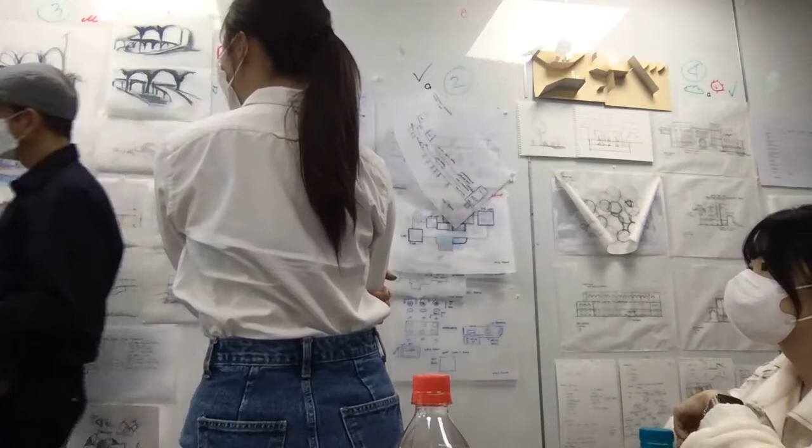But suddenly they have no proportion, so the mood changes a lot over there. So keep working. The next step is, once you have more or less the organization, you try to define a bit more and start considering windows and accesses, because the building is not just lines, but you need to get a bit the mood of the building.

You don't need so much detail at this stage. Of course, everybody sometimes needs to get distracted. It's kind of relaxing because you don't need to think here, but you have to learn that the work is there.

Okay, and what is this, oh, this one. But this is another mode of drawing. I miss a little bit this kind of approach, but this has energy. I think most interesting is the one you show at the bottom, because here you are thinking, and probably you could have spent a bit more time here, checking again 4 floors.

But see, this is like very usual, we keep all the time checking sizes. Then you could explain why 8.7 against 8.3, right? It's a very subtle difference. You must have a reason for that. Maybe not, okay, you don't need to explain now, but you might explain. There should be a reason for that, because that's a very subtle difference.

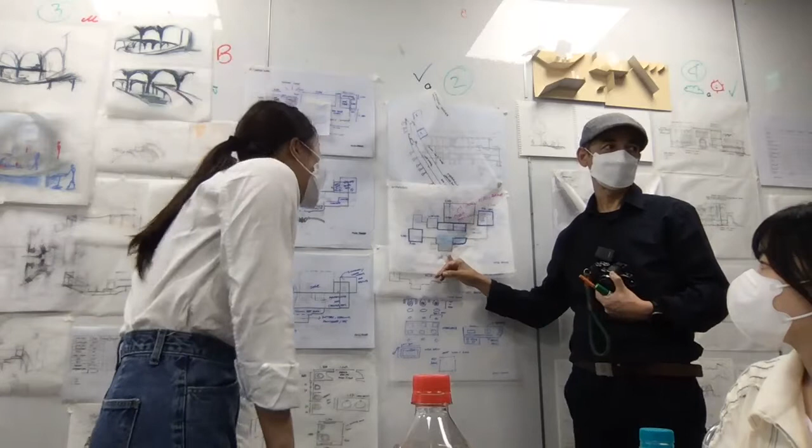How much does it measure? 30.3, or 3, or 3? 30.3 or 33? No, it's 30, it's reciprocal, right, so it's 30.3033, it's about 1 foot, right? Yep, Japanese foot, which is very big. Spanish foot is 28 centimeters, it's very much.

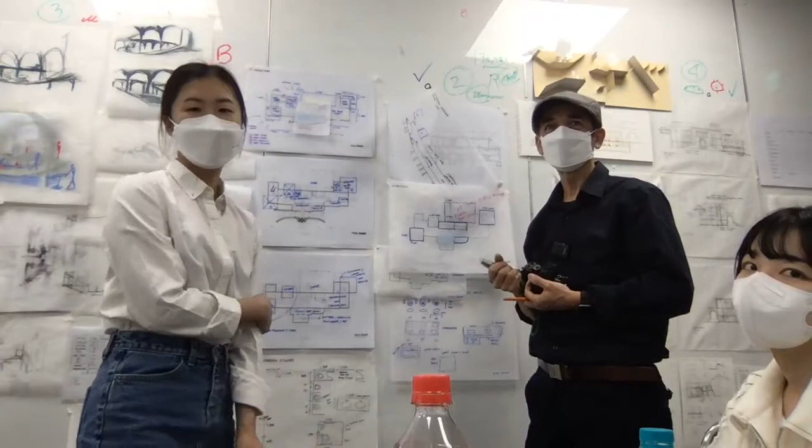Spanish foot is smaller, and American foot is a bit bigger. How is the Romanian foot? Surely you have an old foot dimension, come on, you have the Romans there, so they have for sure the Roman foot. Well, this is mostly forgotten, but in 1930 they were using old dimensions, and those dimensions are exact. So you can have 2 sets of dimensions in the same building.

Okay, questions? Yeah. These are, so if you... like this is...

8,720. Yes, so I took the exact measurement and then moved it a little bit. Same for this. All of them are measurements from the building.

Is that enough, or is there a reason why? Well, it doesn't mean that's the reason, but we should know why. Actually, you are playing with the volume below, right? But you know that those extensions are quite casual, so the main dimensions are the ones in the front and the width, as I told them. But of course, this is a possibility.

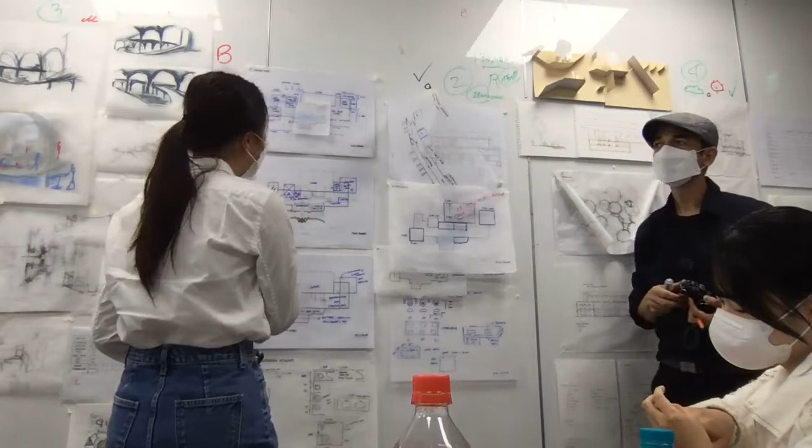Same as working with the arcs as a motif and also as dimensions, you can work with that dimension also, in a scale. But then you have to make sure that it really fits the purpose of the space you're creating, because maybe you may find some other dimension around which you can use, or some real elements.

Because this is also the most clear dimension, the one you access. And this, when you make right dots, it's clearer. This everywhere is like a little bit out of place.

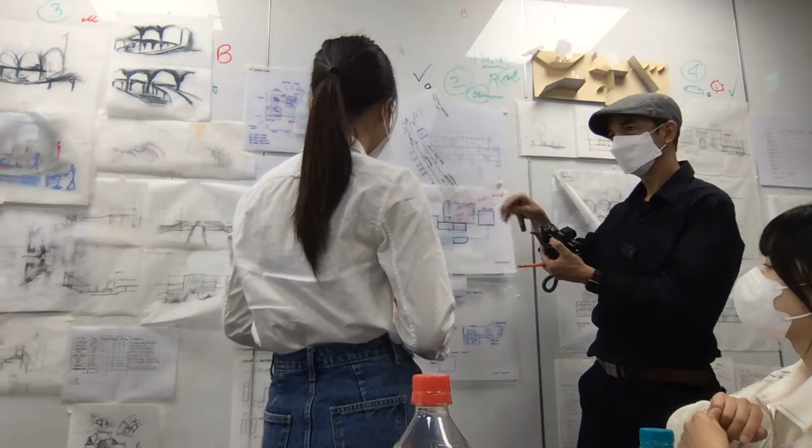I would think a bit about that, because it breaks the mood of the project a little. Look at the Hyunjong first try with that yellow, and then the second try, which is broken but has a bit more scale. This is what is happening here. It still needs to be shaped or conceived within the mood of the project.

Okay, okay, good, great. Are we able to go in a row to the remaining ones? Yeah, Pali, let's go.

No complaint. So, I think there's a Maya. Oh, Maya.

Oh yes, and probably we need to put electricity also, because it will just stop. 30% is like zero, it will just switch off at any moment without warning.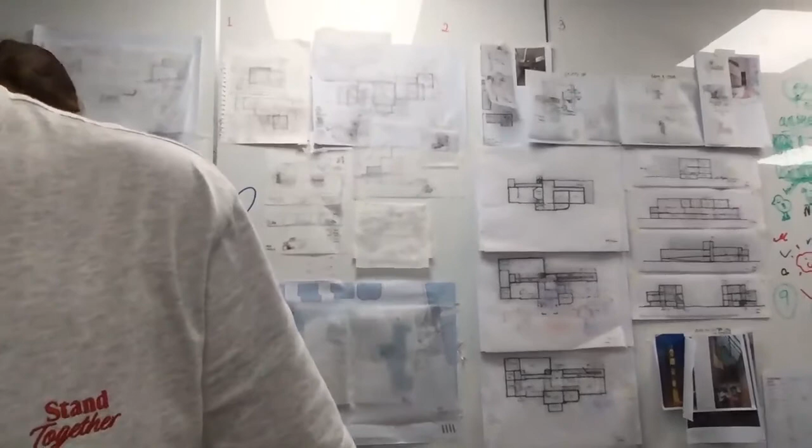That happened the other day in the building systems lecture. A bit more. Perfect, just one second, I didn't do those. Like I'm presenting, I mean, you know. It's weird. Exactly. It's better like that, no? That's perfect.

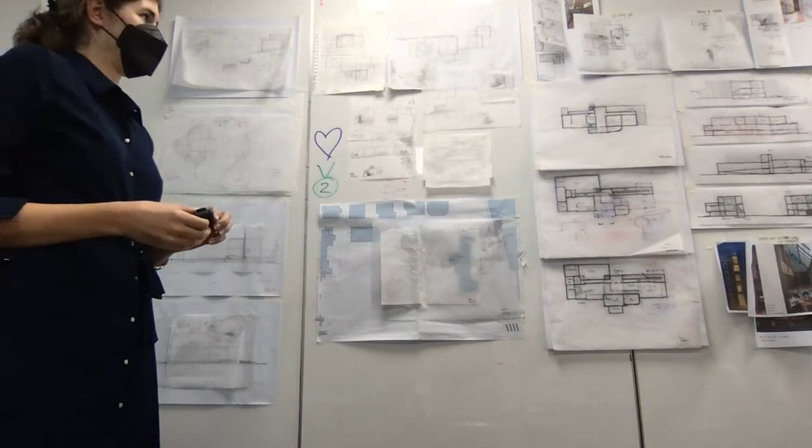Deconstruction, okay. Okay, Maya, yeah, so what?

Okay, okay, so we start there. Okay, good. Yeah, so say the important things. Okay, so I mean, the ones you are a bit stuck on.

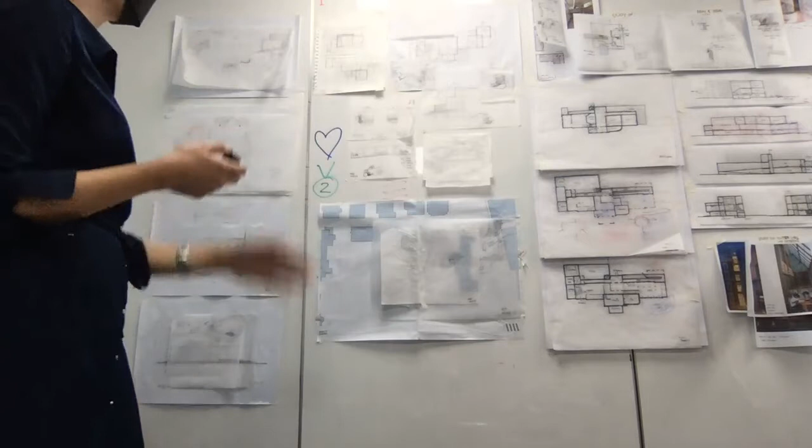Initially I wanted to experiment more with the squares and the things in the existing world, but I ended up not liking what happened, or any of the things that came out of that.

So I started also experimenting with how to organize the different private spaces so that they're not looking at each other, and how the circulation has access to all of them but also must not be seen by all the spaces and things like that. Alhambra, Granada was a good reference in that sense because they already have that system of privacy.

Okay, go on. Yeah, and then I was thinking of your idea the other day to use the gap or the overlap of the building to put in some nature that's more private, because the nature around the building will also be used by the public. So in that sense it'll be more distracting and less pleasant to use as a meditation space.

And I was trying to go back to my landscaping, and then I figured out that it became almost everybody's landscaping.

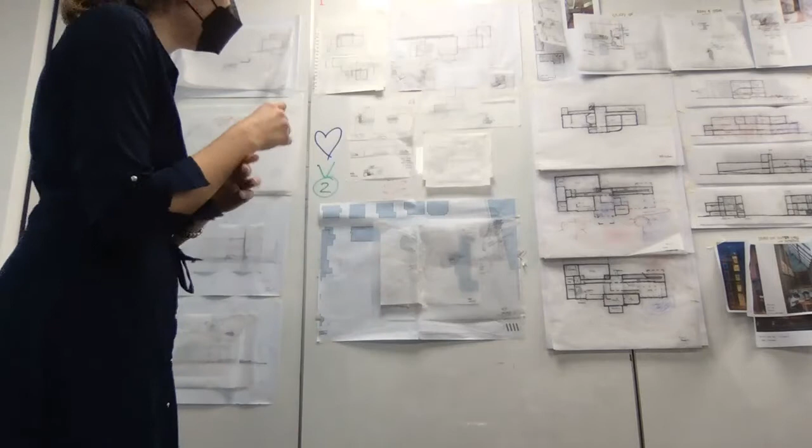So this entrance already has this sort of intention that I'm going for, just on a bigger scale. So I was thinking of combining this with the landscaping and just extending it more into the square. But I don't know, because the height difference is quite big, so there would have to be a lot of layers. So I was thinking of that.

And then also how the landscaping would continue to define the rooms inside, so that even though the curves disappear, when you go into the space, you would understand that it continues. And I was thinking of keeping the curvature of the extension in the plan, but not in the section.

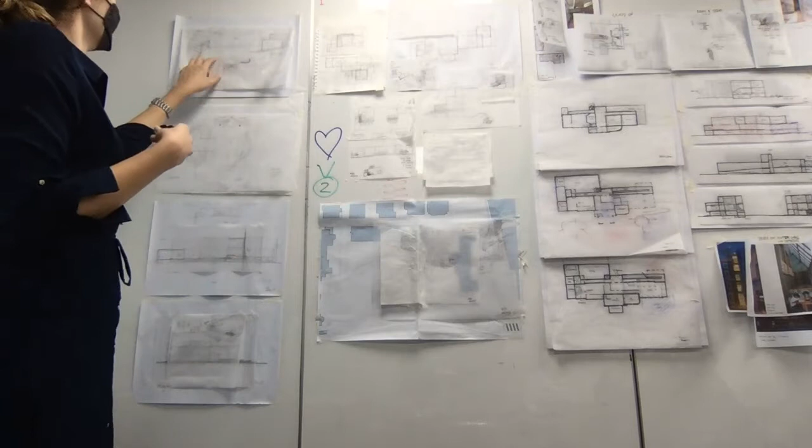Even if you look at the layers, even though from the top view they're very curvy and free, from a section they still look like stairs. So I was thinking of keeping that geometry, kind of extrusions.

I was thinking of keeping that geometry also with the extension, but it's still less defined because we spent a lot of time on this and then didn't have time to develop that much. But yeah, so I was also thinking of the...

Again, how to arrange these meditation spaces to be oriented towards the north and the east, because that's the two directions that are usually considered in meditation spaces. So I was thinking of having the extension in this part, but this is also the east side of the building. Yes, the east and the north.

So this area should be kept more active, more noisy. In this area it would be more calm.

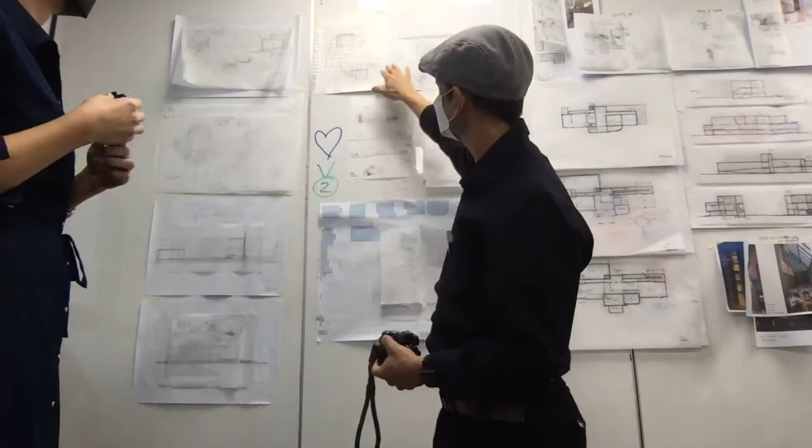I like this diagram, but then I didn't know how to develop it well. Or- because probably it's not in the proper place, because then you're doing things on the side, but this is also landscape.

This is also nice. You could have the choice to be a bit more minimalistic, which is more difficult. But there's opportunity to push yourself to do a small thing with much care, right? And clear intention. Still, the curvature I think is not controlled, maybe because you spent more time on that.

Which is okay. And probably you might not need so many of that, because this is like an alternative to the squares, right? So here the extension will be like a wavy, but cut version. This is a possibility, but you will have to decide.

So wavy is nice. The problem with the wavy is how you solve this kind of disadjustments, and how you solve the accesses and the rooms inside if you have some rooms. There's a way of doing that. This is one of the difficulties. Then there's ways of building and detailing, so you can work with it.

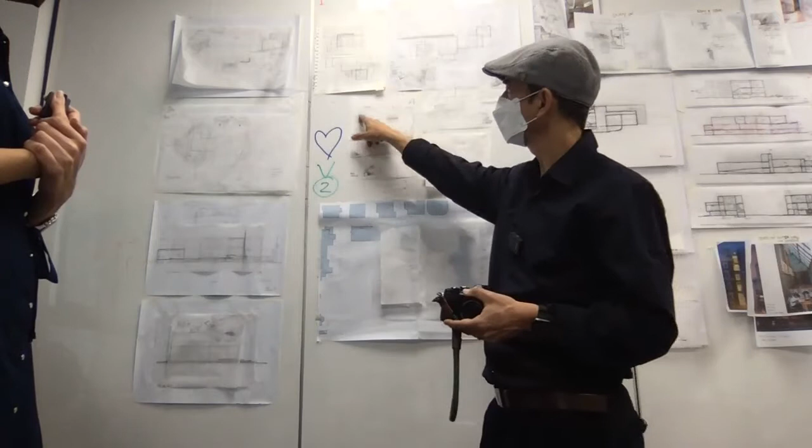But probably it's basically the same idea, just with the square, with the wavy possibility. But I think it's most interesting. And in this case, they have kind of an interesting scale. It's a little bit small, but there's something interesting there.

Okay, comments to Maya? Well, a lot of energy, and nice to see you drawing so much, because once you draw, you need to draw more. Right? So that's the process.

And look, we still have 11 more weeks, or 10 more weeks, 10 weeks. 10 weeks left. This is the last end of week 6. So we have 10 weeks left.

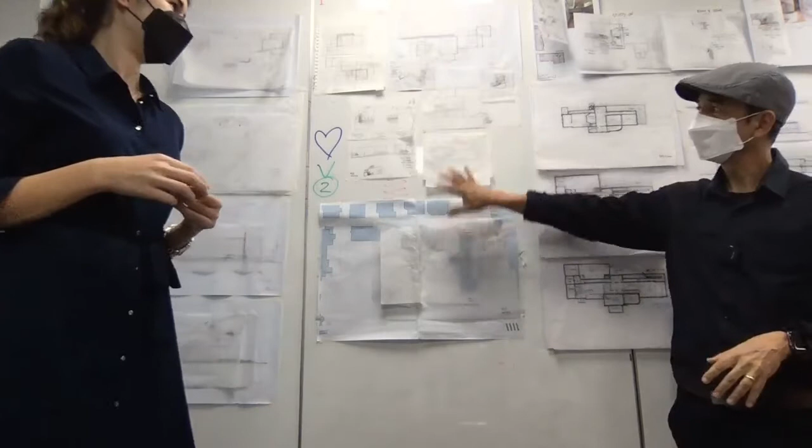We have to hurry. Okay, so there's the moment also to start checking the size on the program, not to work in abstract. So when you have the proper size, you will have, as you see everywhere, you have the size. You have to take decisions which may help you in whichever position you are, whichever idea you follow.

Maybe you can still consider both. Comments to Maya? I see you very quiet.

So those waves. So Sangjun. You have a responsibility, so come on, you have always nice suggestions and ideas.

Okay, so do you have any questions? I see you're stuck with the selections, but I think you can go both ways, or you could try to unify. I see more control now in the square, which is logical. But maybe there's still something subtle, because this small gesture is also nice. It's a very nice balance there.

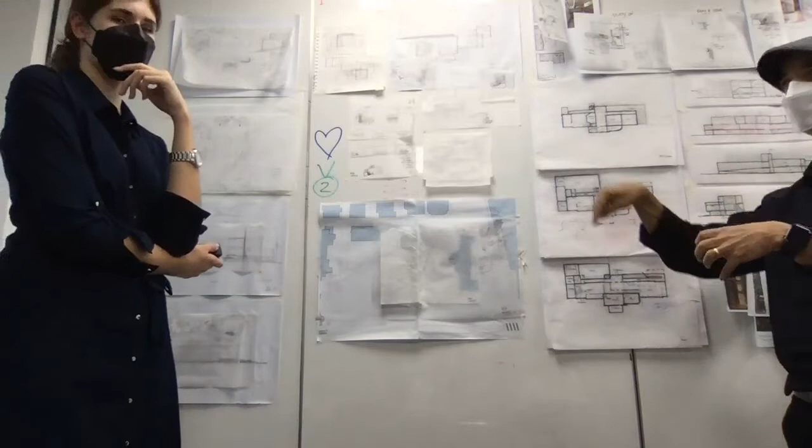My suggestion is to make sure you already control the program position and sizes. That will help you, because then you'll have to work on the circulation. As we discussed, circulation is more than just arrows, it's really a system of how you move around the building. For the healing center, you need to be careful because you'll have changing rooms and bathing rooms. That's really complicated, and you need a lot of space for those intermediate elements. You'll need more than just toilets.

Right, okay, good, great, thank you. So from this side it is complete. We have 3 left. There's William, I think, yes, 1, 2, 3... 4 left. Okay, Connie.

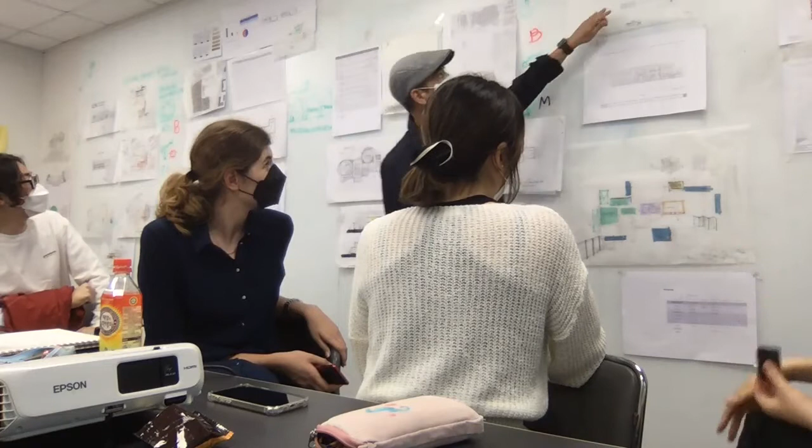Actually this is interesting, this seems you're working with Maya. I think we're having the same project. Oh, but then they are different. But this is very much working aside. If I were you, I would forget about this pavilion because surely you will make better. But it's nice you removed the theater there.

So you have water, water is a good idea. The good thing of water is you can expand as much as you want without much problem, so you can change the scale with water. In that case, Alhambra, Granada, and any kind of Mid-East Islamic architecture has a lot of water. The climate is not so. You have water in Korean architecture too, but it's more like a pond in the south. The Confucian ponds are square with a round island in the center, symbolic of earth and heaven, kind of ideal. You might want a reference or be more practical, like the Islamic gardens where water is just for climate control, which here in Korea doesn't work.

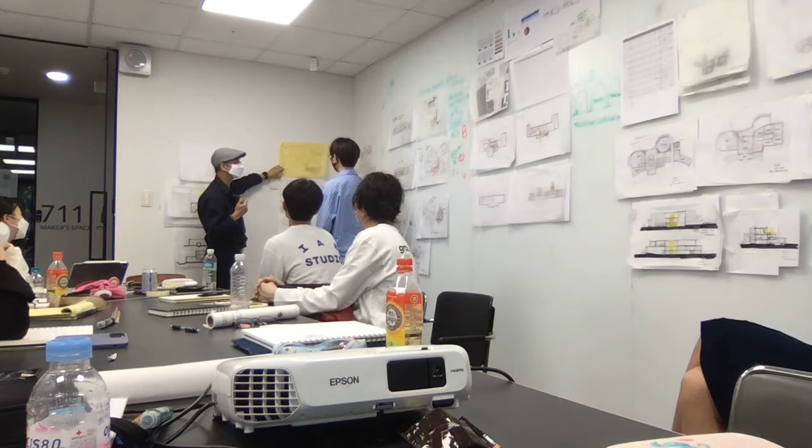So what happens with the donuts here? So you have all the program detail already. Make it just clean and clear so I can read it. As for me, I have to come here to see the letters, I'm a bit old, hate to say it, but I have difficulty reading it small, so I can check it. This is important, I check. The program won't be very strict, but I have to check if something strange happens there, and for that I need to spend time checking what you are planning. If you don't do it, you may have surprises later. So when you have the list, let me see it and think about it.

So you have this kind of Asplund zooming. At some point it's like a Boullée. Louis Etienne Boullée. Newton's Cenotaph, right? Because it appears like a section, okay, Newton's cenotaph. You know the project, right? The kind of spherical form comes from Newton, kind of grandiose. Can I draw here? Yes.

So the building is like this, right? Part is underground, you have to go up and then you go down, and this is enormous. So you have the light coming there.

It's kind of like a bubble almost going out of Earth. So I thought this was a section. Oh, but then you have geometries. So you're in the same stage as Maya and Unjin with the geometry.

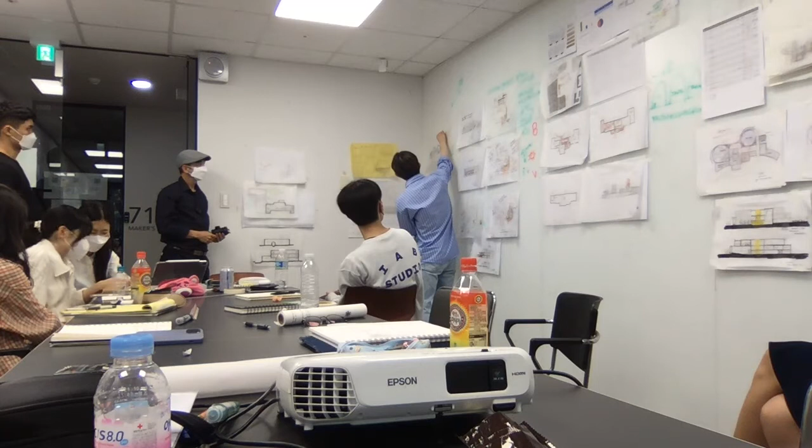I thought that it would be nice to give a gentle touch, like a gentle touch to come inside, something like that.

You know, that set of drawings is interesting. Yeah, because it's like the working process and just thinking around. And this is very nice. Those three are very rough. So I would say the same I said before, but even more.

So those two sketches are really full of thought and possibilities. The lower part is a bit in a hurry, not so much successful. In this case it's more extreme, right? I see a lot of things happening there which could be possible. This is like done in a hurry.

Don't hurry. Even if it is the last minute before the submission, it's better to have something which is really deep and suggesting than something done in a hurry which just messes up everything. Okay, so everything is rough here, so I wouldn't show this.

You can see almost the same here, and I can imagine more. It was the same thing, but you see, he is very clever - he never gave us exact position. Everything is changing shape, and we can see the thinking. This is more or less convincing at times, but we are clear he's just experimenting and looking around.

So when you do this, this is very precise. And this is confusing because it looks like a shade, but is this some space you use? I would just question it. Everything here is a bit - well, this is the line there, so I'm not so sure - but the circles are very strong, because they are self-referring.